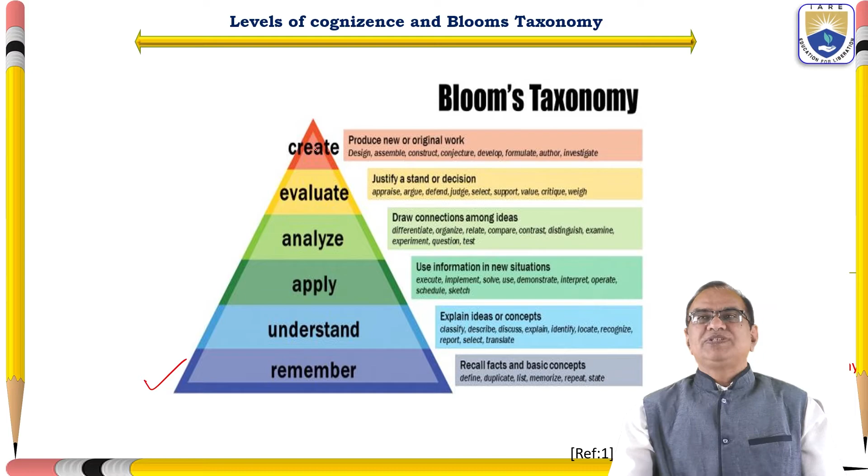You can design some product, you can assemble the product, you can construct a building or any model, develop some new ideas and new model, formulate the issue, write something new about that, investigate the problem. If you are able to do that, then it means you are in the top hierarchy of Bloom's taxonomy. That we have to understand.

Next is discussion on the course description. Before we start the course, all the teachers and faculty of a particular course have to make the course description. A course description is a brief summary of the significant learning experience for a course. Course descriptions appear in individual course outlines and in the program of studies for individual programs.

Course descriptions should be student-centered rather than teacher-centered or course-centered. This we have to understand very well. The first point: it is not the teacher who has to get the goal. It is the student who has to get the outcome. So your drafting of the description should always focus on the student, how the student will obtain the goal, how the objectives can be met. That type of description has to be made.

Use brief outcome-based descriptive phrases of active verbs, as I have shown before, that is design, create, plan, analyze. Then be clear, concise and easy to understand. Whatever goal you set, make sure that it is very clear to the faculty as well as to the student. Detail significant learning experiences and benefits the student can expect.

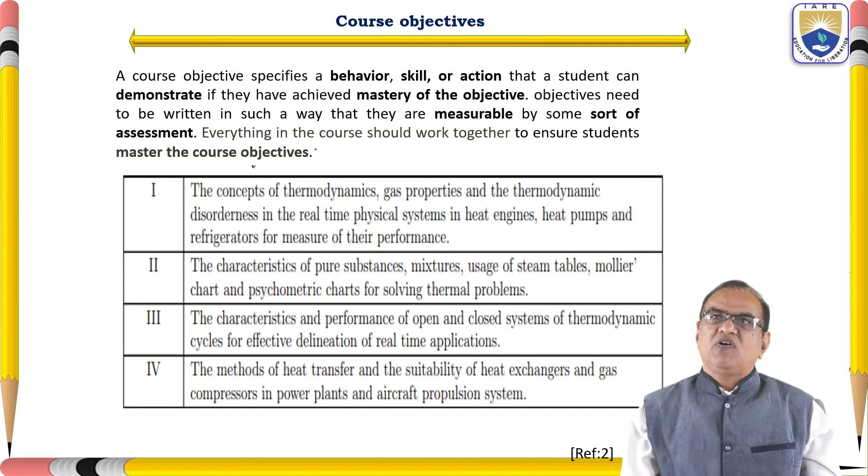In this behavior, skill and action, you make it such that students should be able to demonstrate what they are learning, and the assessment should be measurable. You should measure and then assessment should be done. Here I have written 4 course objectives for engineering thermodynamics.

Next, these are the outcomes. These outcomes should be focused on the student, what students should be able to perform. They should show that these things are there. Course outcomes are central to any course curriculum. They articulate to students, faculty and other stakeholders what a student will achieve in each course and how their learning will be measured.

So we have to make sure what they are going to obtain, whether the goal set in the previous slide, that is the objective, is met and whether they are able to understand or not. Then, a learning outcome is a measurable, observable and specific statement that clearly indicates what a student should know and be able to do as a result of learning. So these things you should be able to understand.

Here for thermodynamics, these 6 course outcomes are specified, and if you see, you have the Bloom's taxonomy levels. So here the second level, and apply is the third level. So up to the apply level, we should make sure that students' cognizance level reaches from remember to understand, from understand to apply. And if some students are very good, they can go for analyze, evaluate, and so on.

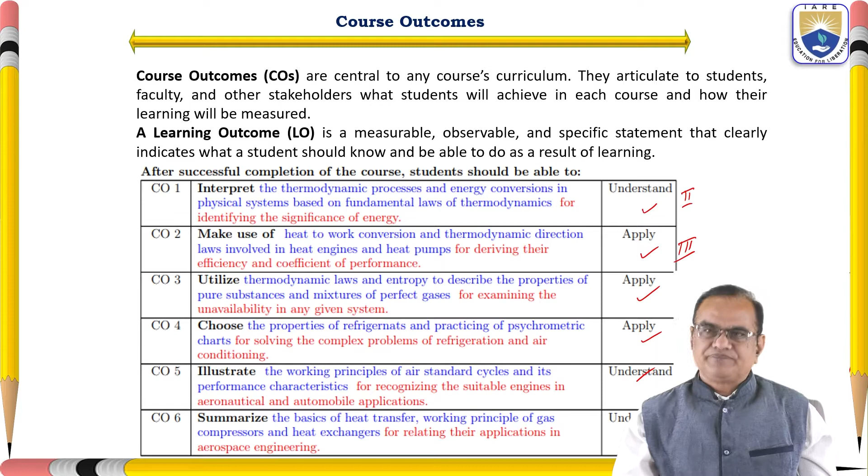These are the competency levels. So here, out of 6, there are 3 understand and 3 apply. So our objective is that our students should be able to understand the topics, and also they should be able to apply them as and when required.

This is the syllabus which we have in our institute. This syllabus is divided into 5 modules. Module 1 is basic concepts and first law of thermodynamics. Module 2 is second law of thermodynamics. Module 3 is pure substances and mixture of perfect gases. Module 4 is power cycles, and module 5 is elements of heat transfer and gas compressors. So these are the 5 modules which I am going to cover in due course of time.

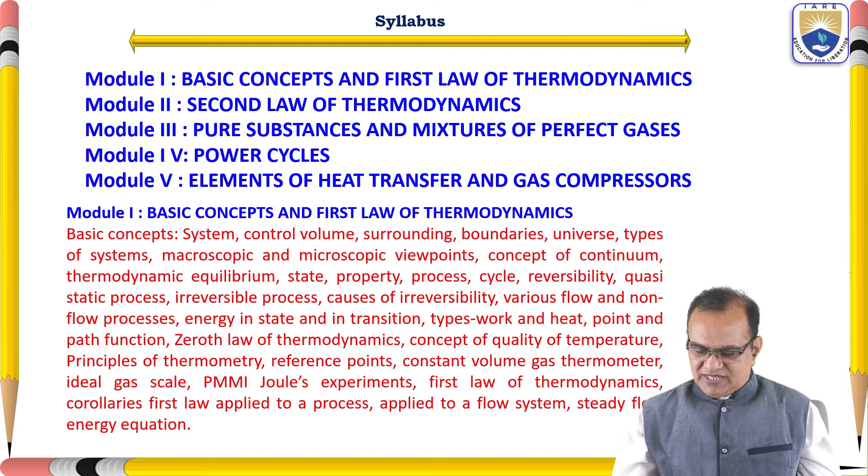And these are the topics of module 1. Here I am only showing module 1. As and when I start module 2, that time I will give all the topics. So in this, we have the basic concepts: system, control volumes, surroundings and all, these will be covered in due course of time. Now, if you see here, introduction and history of thermodynamics.

So what is the meaning of thermodynamics? The word thermodynamics came from 2 Greek words, therme plus dynamics. Therme means heat and dynamics means power. So in this, the heat is converted to power or work. So that is the meaning of thermodynamics. And after that, the word energy was given by Thomson in the 18th century.

In early times, man made efforts to convert heat into power. That is why this name has come. So thermodynamics, by the old definition, is that at that time they used fire to convert fire energy or heat energy into work. That is why thermodynamics has come. If you see the historical perspective, the word energy was first introduced by Thomson in the 18th century.

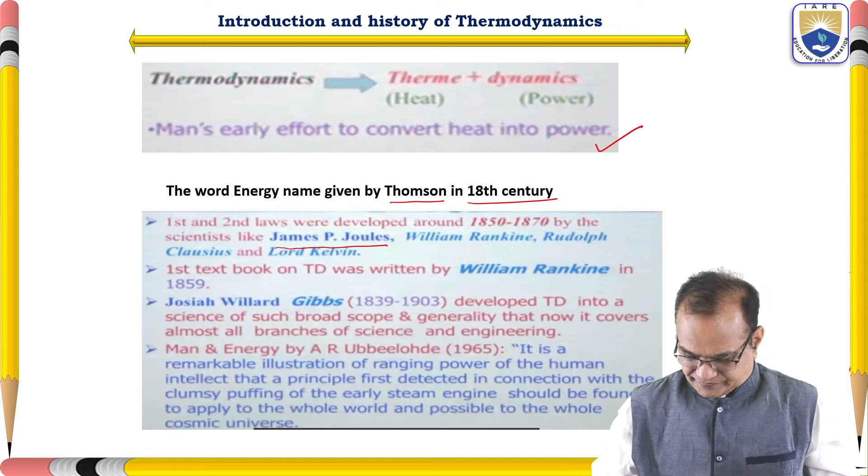Now, my next topic is engineers and scientists. So, what is an engineer and what is a scientist? This we have to understand, and what is the difference between these two. So, what are engineers? Engineers design and develop a product and a process.

Especially in an engineering college, we have to produce engineers. It means they should be able to design and develop a product or process, or they can improve the existing product and process. Suppose we have made something or it already exists, can we make some improvement in that? If you are able to do that, it means you are an engineer.

One has to use available resources, that is energy, space and time. So what is the meaning of this, and what is a scientist? There is a basic difference between the scientist and the engineer. Scientist has to discover things from existing natural conditions.

If you see, Newton's laws were discovered in the 17th century, that an apple is falling from the tree towards the earth. But before that, what happened? Were the apples not falling from the tree, or were they going upward? It means the concept, the existence of the same laws, were present from the beginning of the universe.

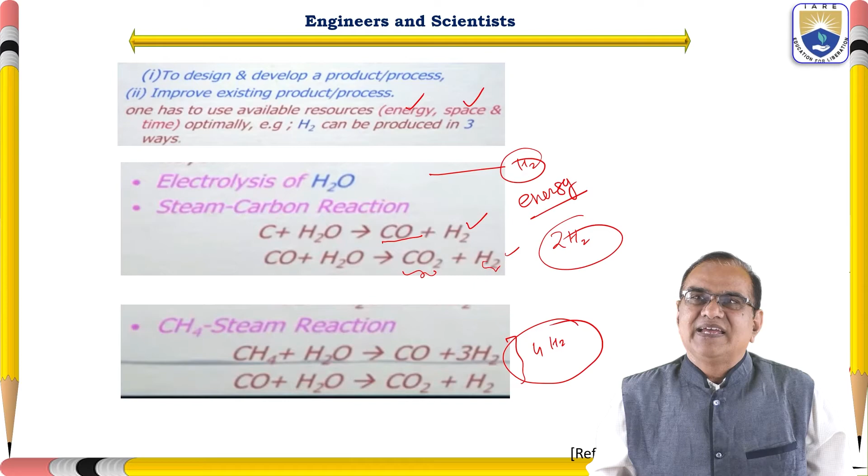In the above example and in general, engineers quite often come across certain questions that need to be answered. For example, are these chemical reactions, physical processes possible? Just now we gave a reaction here, C plus H2O. We have to think along this line: are these chemical reactions and physical processes possible?

How much energy is required? How much quantity is required to generate it? If it is more than this, there is no use. To what extent does the chemical reaction or physical change proceed? How much percentage are we getting?

How much pollution are we getting? If it is generating more carbon monoxide, polluting the environment, then it will not succeed. The sustainability of the system will be in problem. To what extent does the environment get affected?

Any product we make or any technology we develop, we should make sure that it is environmentally friendly, eco-friendly. Then only will people accept it, because nowadays no country will accept any product if it produces a large amount of pollution.

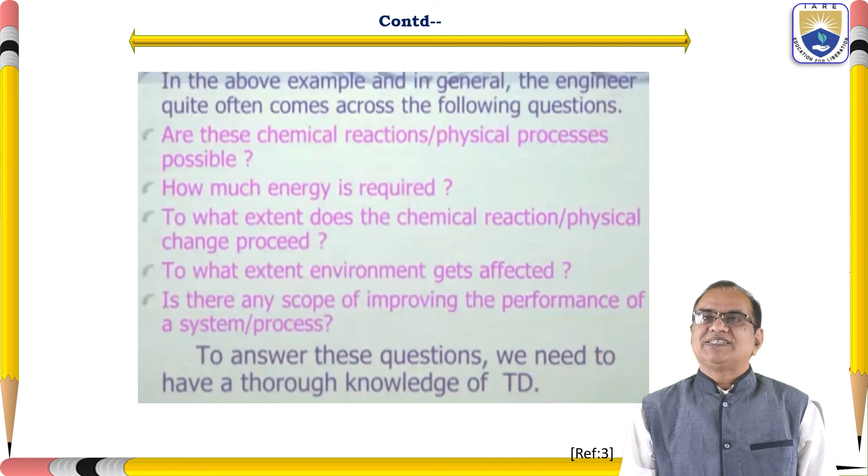So about thermodynamics - thermodynamics is a science dealing with energy and its transformation. What is thermodynamics? It is energy, and how it can be transferred to work. That is your first law of thermodynamics.

Then we have entropy. This entropy, in fact, is not only used in thermodynamics but can be used in any system. Entropy means a loss, like friction - everywhere you go there will be friction, so there will be some losses. Those losses we have to understand and try to avoid.

So this entropy is also called the third law. All these four laws are based on experimental observation, which cannot be proved directly - it is not something you can prove by mathematics.

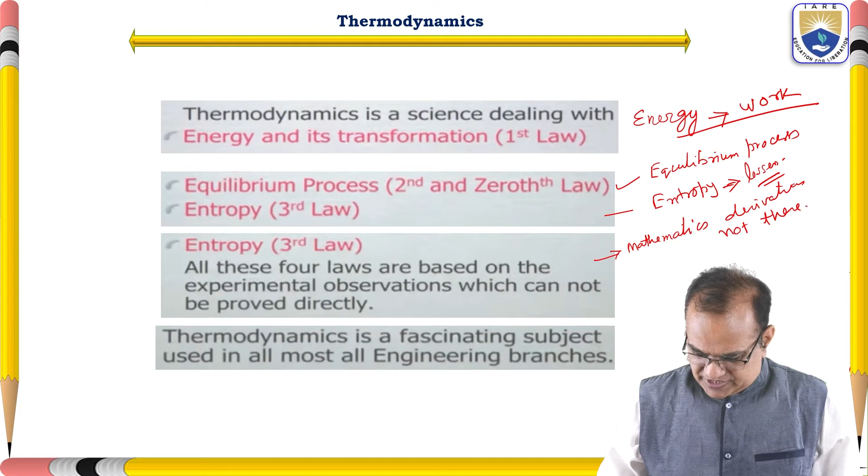In thermodynamics, we have three main elements. The first one is energy, then we have entropy, and the third one - actually the second one - is equilibrium. So these three components: energy, equilibrium, and entropy, make a system a thermodynamic system.

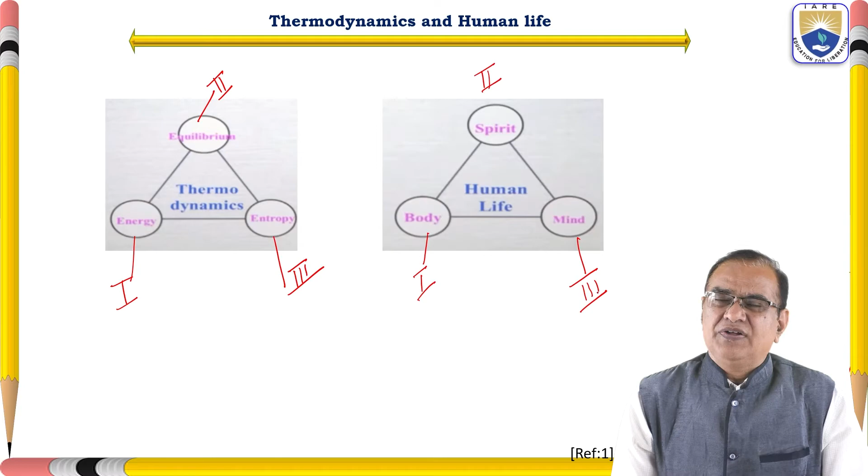Like your human body - we have the whole body, the mind also should work with your body, and there is a spirit which mind and body have to make together. Then a good human life can be made. So here also we have three elements: body, mind, and spirit - when you combine them, a good human life results.

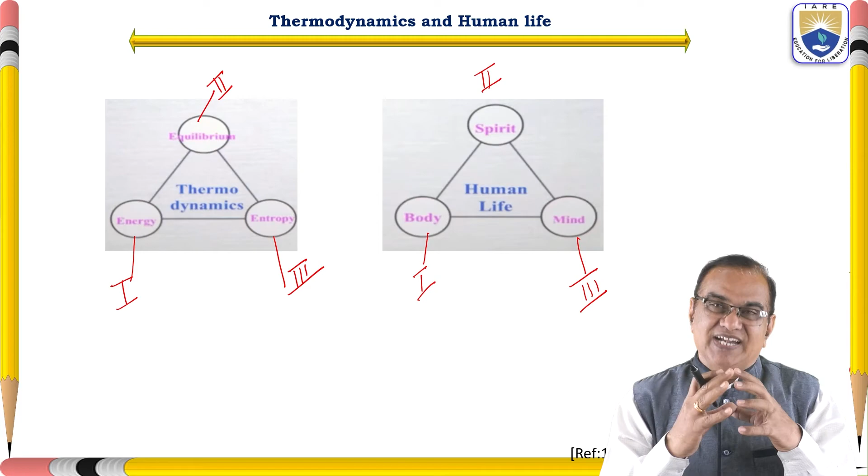Same way for thermodynamics: energy, entropy and equilibrium - these three conditions, when combined, create the thermodynamic system.

Now I will explain the applications of thermodynamics. Even in this classroom, we have the light, the camera in front of me, the PC and digital slide in front of me. Everywhere there is heat, temperature, energy, equilibrium, entropy. So wherever we are, everywhere you will find some application, and I am going to discuss these applications in short. In this room we have the light, camera, AC - these can be summarized as thermodynamic applications.

All engineering activity involves an interaction between energy and matter - here are a few examples. Any engineering activity has energy and matter, and when they interact, there is a thermodynamic application. In our house we can see the refrigerator, air conditioning, humidifier, cooking stove, iron, TV, mobile, pressure cooker, bulbs, and so many other things.

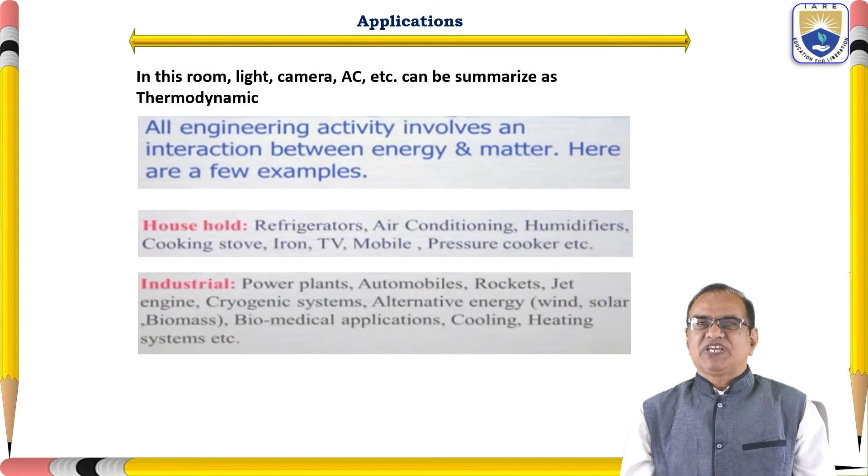All these are applications of thermodynamics. In industrial applications, we have power plants, automobiles, rockets, jet engines, cryogenic systems, and alternative energy like wind energy, solar energy, biomass energy, nuclear energy, and so on. There are also biomedical applications, and cooling and heating of systems.

Here I have shown some examples of thermodynamics. First, our body itself is a thermodynamic body. Our body temperature is slightly higher than the atmospheric temperature, and if you see your breathing, the heat of your breath is much higher than the atmospheric condition.

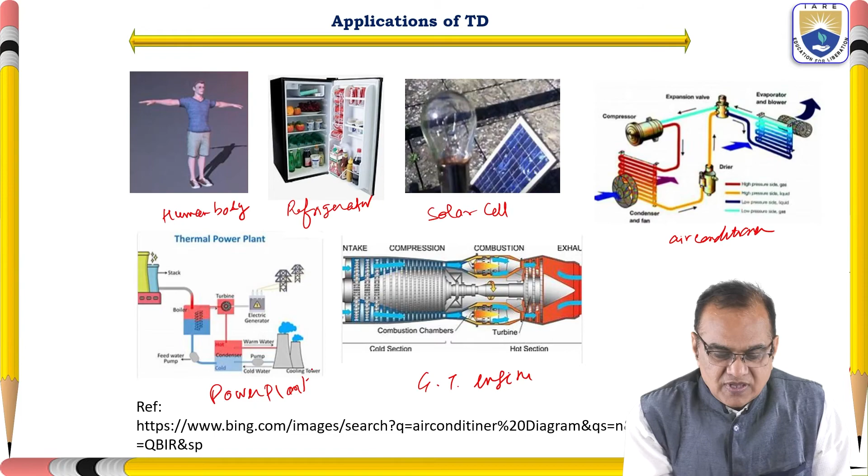There is a refrigerator shown here. Then we have the solar cell. Then we have a power plant or air conditioner. Here we have the GT engine, gas turbine engine for aircraft, and this is the thermal power plant, or the hydraulic power plant. I think this is the hydraulic power plant, and from here we generate electricity.

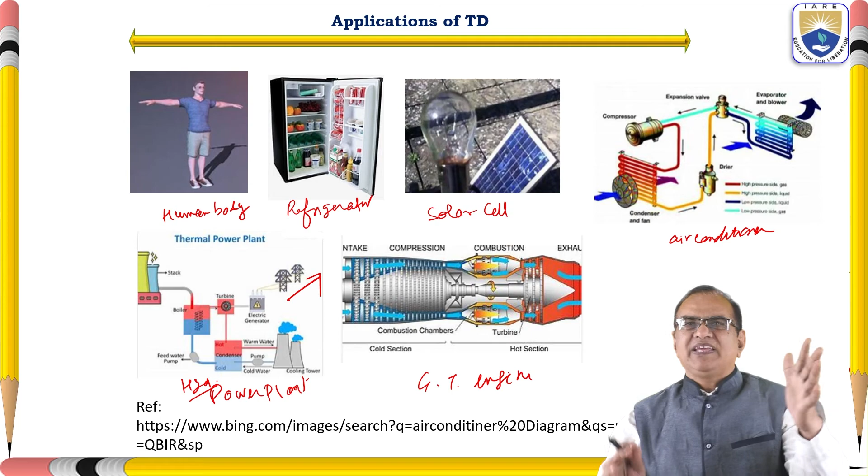So we are converting one energy to another, and here are some examples which I have given. There are some more examples: rocket launchers, missiles and all. Here we have hydrogen cells and the power plant, and here we have the nuclear power plant.

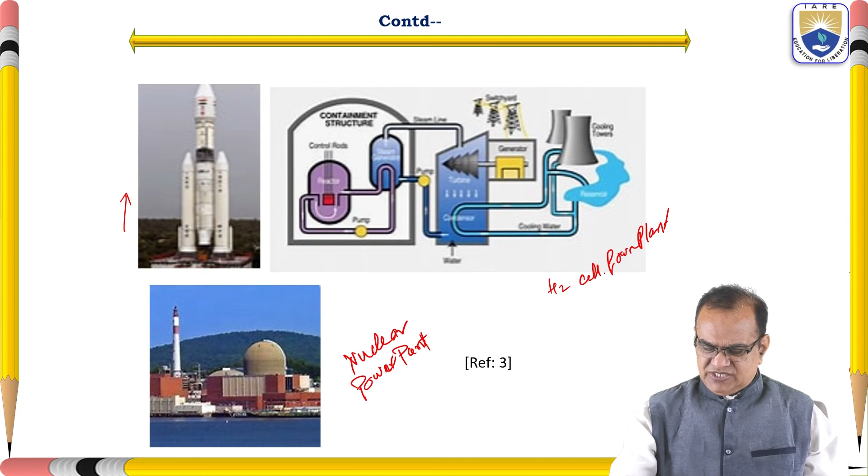These are the few examples which I have shown, but everywhere you see, trees, vehicles, animals, lakes, seas, wind — everywhere thermodynamics can be applied. Medicines, your blood circulation, everywhere this concept can be used.

Now, scope of thermodynamics. There are a number of scopes, like equilibrium thermodynamics and non-equilibrium thermodynamics. We will be studying the equilibrium case, not the other. Chemical thermodynamics we will not be going into, atmospheric we will not be going into. Most of the things we are concerned with are only the main topics here. Equilibrium thermodynamics makes the case very simple, while chemical thermodynamics relates to chemistry people, how reactions take place.

Atmospheric thermodynamics deals with cyclones, thunder, storms, rain and other phenomena, and we can do analysis and calculate things with the help of thermodynamics. Geological thermodynamics covers earth movement, motion of the layers of the earth, and other activities. Industrial ecology, pollution by industry, we can also simulate, calculate, and understand.

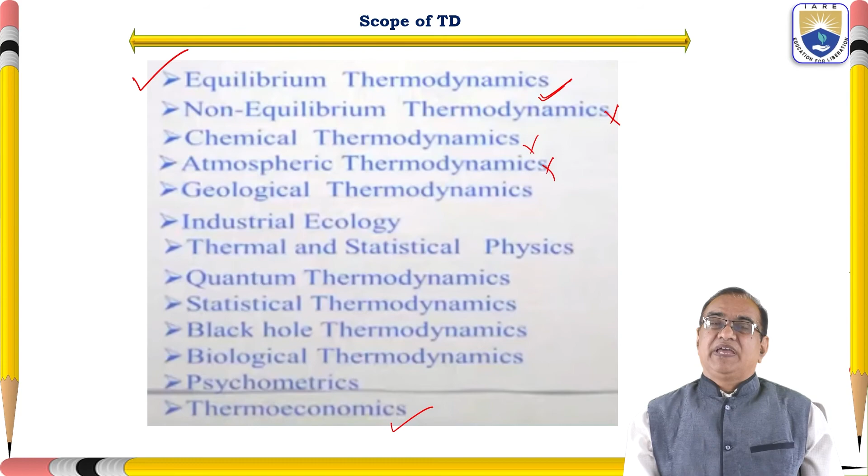Thermal and statistical physics, quantum thermodynamics, statistical thermodynamics, black hole thermodynamics, biological thermodynamics, psychrometrics, and thermoeconomics. Nowadays a new topic has come up called thermoeconomics — how economics can be understood with the help of thermodynamics. These are the very important areas where we can use thermodynamics.

This means the concept of thermodynamics is universally accepted, and it will remain forever as long as nature exists — these laws will be applicable. This was given by Albert Einstein, one of the greatest scientists of this universe, who gave these thoughts about thermodynamics.